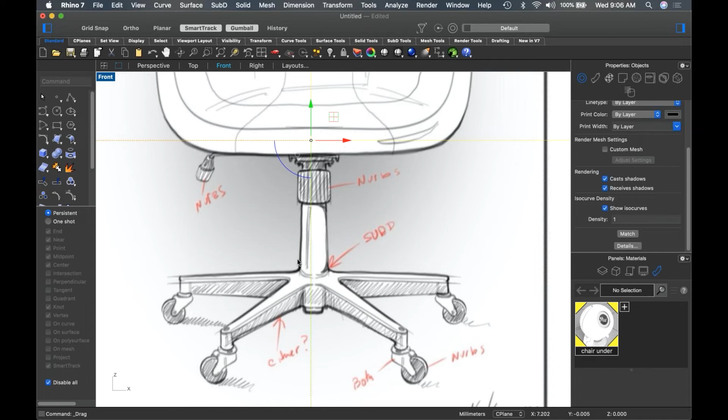We could build this out of Nurbs, but it would take a long time and we'd have to do lots of filleting and blending and continuity checks and all that kind of stuff. So actually this thing is a very good candidate for SubD, and that's probably how we're gonna proceed today.

So the first thing I do, and let me back up just from the very beginning, the way I start all of these videos - actually let me back up one step further and say, if you haven't seen one of these getting started videos before, they're intended to be interactive, right?

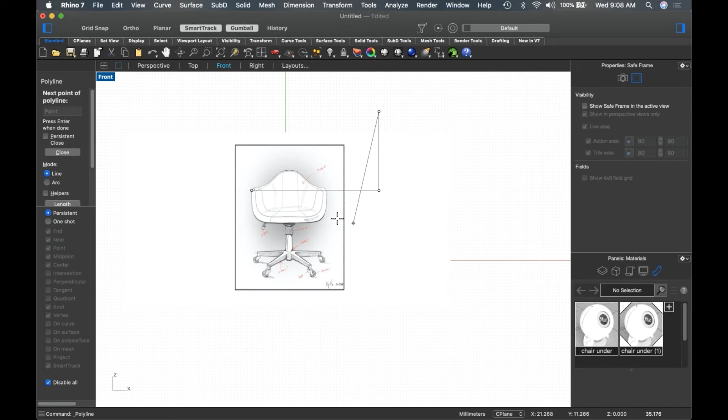So I just draw myself a little hockey stick out here in space, and then I grab this and scale it using my O snaps from one end to the other, and then I can say, okay, that's about 40 units.

Now, because this drawing is not in orthographic space, it's kind of got some perspective on it. You can see the bottom's tipped and the top has some perspective on it. So it provides some challenges when we're going to model it - we're going to actually have to do a little bit of interpolation along the way.

But as far as scaling things, if we know how wide this tube is, we can scale to the tube. If we know the diameter of the wheel, we can scale to the wheel, and that way we can get our sketch in about the right neighborhood of size.

So let's go ahead and make this a little bit more modeling friendly. I'm going to come down here to the materials panel, and scroll down to where it says object transparency, and drop - actually raise - the transparency on this a little bit to fade the image out.

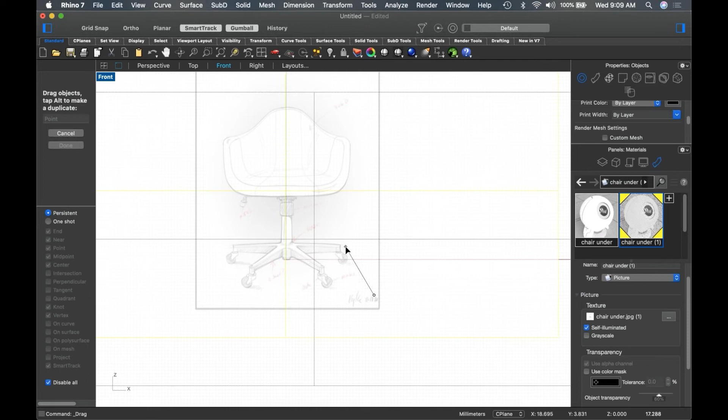Then I'm going to just nail this down kind of somewhere over the origin, somewhere in there, right? I want to be just centrally located. Then I'm going to go to the perspective view, and I always slide these images out of the model space. Everybody asks me why I do that, and the reason is because I can't stand when something looks like this.

Especially in shaded mode, it's particularly annoying to try and model when your sketch is in the center of your model. So if I just take it and tuck it back here in space, I can see it and I can see my references, and if I go to the front view, it's still lined up the way I want it to be. So that's why I do that.

And then if I had extra views, I would take those and copy them, and move them around into the different locations of where I wanted them to be.

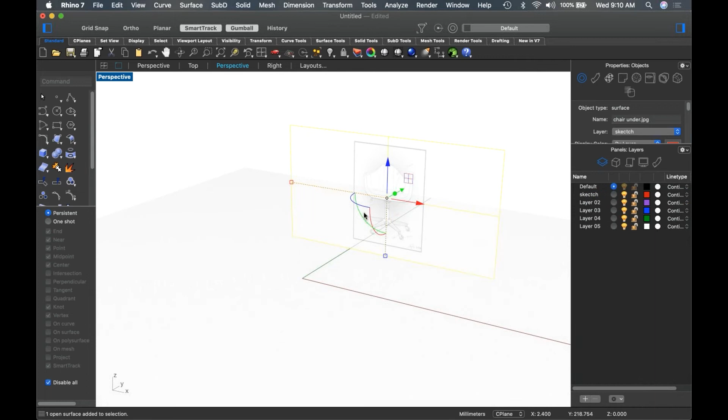And then I go back to my layer stack. Let's make this layer called sketch, and then right click and change object layer to move this image onto the sketch layer. The reason I like to do that is because I can lock these, and I can also hide them or unhide them as necessary. If I had more than one view, front, top, right, bottom, side, whatever, I would put each one on a different layer.

Spell it right. Yeah, I went to art school, but not that much art school. I can actually spell a little bit.

So we've got this set up. We've got this so we can turn it on and off. We've got it faded so that we can see. So let's start talking about what we want to do here.

We've kind of identified that we're going to do the chair out of SubD, and the base out of SubD. This little adjuster bit here, we may do a little of both. The wheels, we may do a little of both, and go from there. So let's go for the biggest bang for the buck here, which is the seat itself.

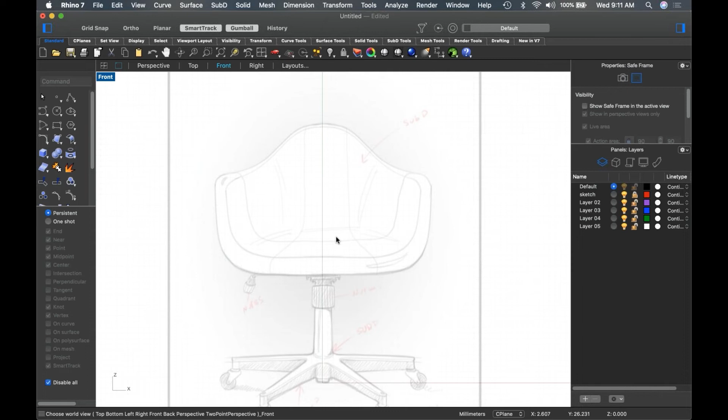And I'm going to go to the SubD tab over here. If you don't have tabs like this, by the way, go to the preferences and go to themes.

I'm running in the default - oh, they changed it. It used to be Mac and Windows, now it's minimal and default. So this is actually the default now. Never mind, you probably have this if you loaded it in V7. In V6, this used to have a Windows or Mac theme, and this was called the Windows theme that had the tab on it. But looks like they updated that correctly for V7 finally.

So everybody's working in the same model space.

All right, so we go to the SubD tab. I'm just going to grab a box here, and then in my XYZ count, I'm going to change this to 4, tab, then 4, and then 4. Come on now.

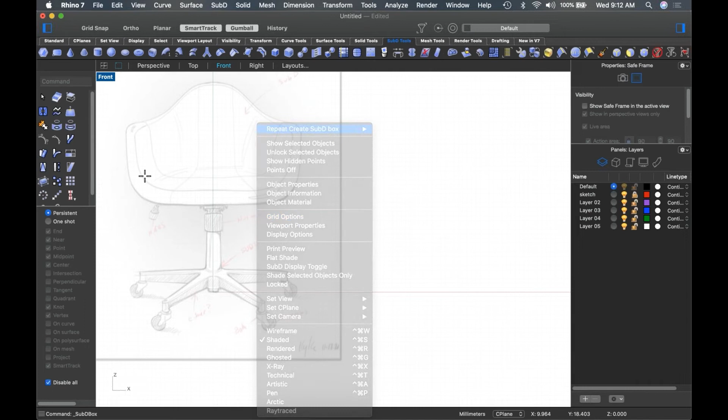Make that 4, 4, 4, and I'm going to do it from the center, and I'm just going to nail it down at the origin - I did not do that, so let's do this. 4, 4, 4, and then I'm going to do it center, nailing it down at the origin. I'm going to shift drag to bring it out as a cube.

I'm either going to pick the outside of this to aim for or the inside of this. I either have to make the seat bottom and then flare the arms out, or make the arms and then taper the seat bottom out. So I'm probably going to just aim for the seat bottom. I'm going to do something like that, and then just use enter for the same height. I'm going to use gumball to move it up.

Place it there, and then I'm going to go to wireframe so I can see what I'm doing. All right, so I've got my SubD placed, and I can see right off the bat that this thing is a cube, right? And my chair is not a cube. So let's fix that, and the way we're going to do that is I'm going to hold down Shift Command and click some faces, double clicking in between.

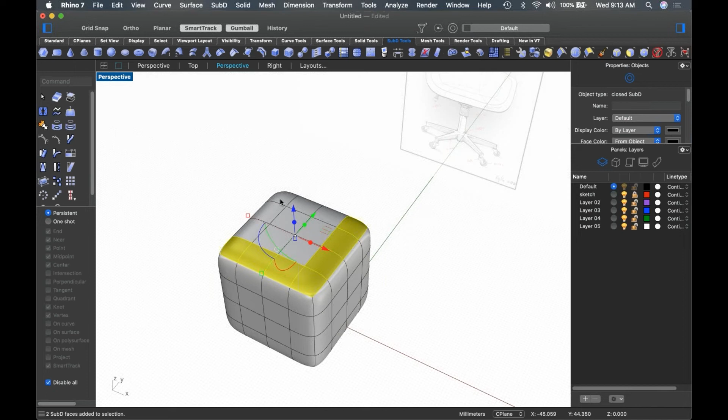And then I'm going to just delete. That's going to open the top. I'm going to Shift Command click a couple of faces, double click in between. See how it fills those in? Delete that. So now I've just got the basic form of my chair, right?

Go to the front view. I'm going to go back to wireframe. And I can see that I probably have one too many rows here. So I'm just going to Shift Command drag and delete it. Oops, got one too many. There we go. I'm going to delete that edge. And that gives me the basic layout of what I'm trying to do here, right?

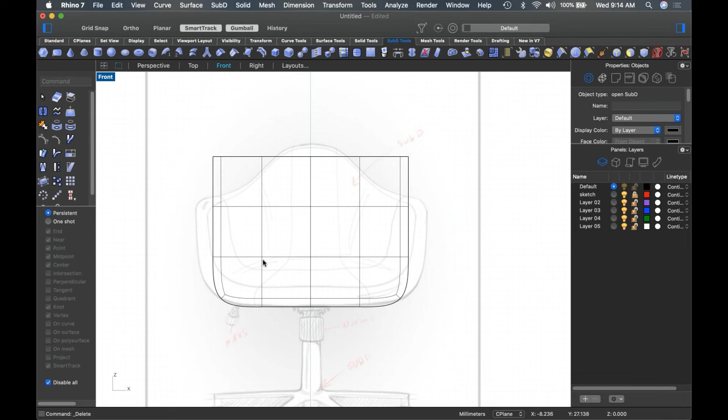So I'm going to focus on just modeling on one side of this. And to do this, I'm going to switch to box mode by hitting the tab key. And you can see that the SubD switches to a polygonal or control cage view. That's one of the cool things about SubDs, is they exist in kind of two spaces, right? This is the control cage or the polygon model, and this is the interpolated SubD, or the smooth model. So we refer to this as box mode, and we refer to this as smooth mode.

Now, how many of you have experience with SubDs? Has anybody seen SubDs, modeled in SubDs, know what a SubD is, or is this all new for everybody? Because if it's all new, I'm going to segue out for a second and just do a little demo on how we control the shape of a SubD. All new, all new, all new. Okay, I would expect it would be new for most people.

So let's talk about this a little bit. I'm going to scoot this off to the side for now, and I'm just going to make a new one so that we can play with it without screwing up the old one. And if I turn this on, right, if I go over here and I turn my points on, go to my standard and turn my points on, you can see that when I switch from smooth to box, notice what happens. The points don't move, right?

So there's a couple of pieces of a SubD. There is a control vertice, which is here, right? And the control vertice does not move. It stays in the same place no matter whether you're in box mode or smooth mode, okay? There are faces. If I shift command click, this is a face, right? And we can pull that and move it, and you notice everything attached to it kind of moves with it. There is an edge, and I can pick these edges, and I can move these around like this, right?

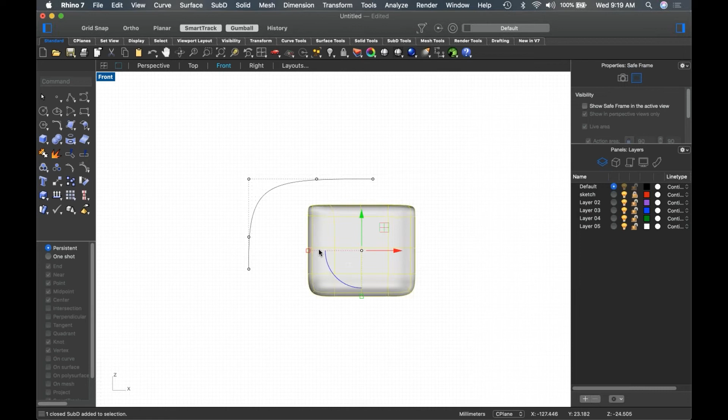That's the exact same thing that would happen here if I took this point and did it right and moved it up there. So you already know a lot about SubDs because you already know a lot about curves. Now, the one thing that I want to reemphasize about SubDs is that lightness is key.

So the lighter you can keep these things, the smoother and nicer and more controllable they're going to be. The same rule applies if you're doing a Nurbs corner. We don't ever do a Nurbs corner like this, right? That would be a terrible curve. We can all agree on that. Now, I get a really nice sharp corner here, but this is a mess. I would never do it that way.

If I needed a sharp corner, I would simply just do it with 3 points, but very close together. I can get a very sharp corner out of that. In fact, I can get them even closer as long as they don't cross, and get a very tight detail out of that depending on what I want to do.

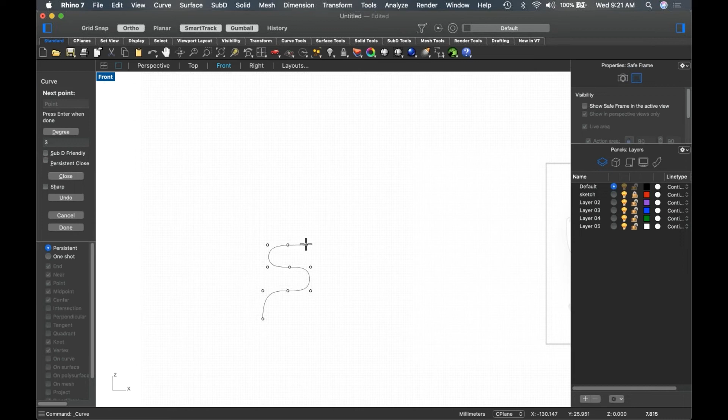Now let's extrapolate the rule of 3 one more time and think about this in a little bit more esoteric terms. So if I had a shape that goes like this, right, I'm still doing rule of 3, I'm just stealing a point from one part to the other. So let's do some counting. I've got 1, 2, 3, which makes up this corner. I've got 1, 2, 3, which makes up this corner. I've got 1, 2, 3 that makes up that corner, and so on and so forth.

If we looked at that on a SubD, each one of those points would be an edge. So if we wanted to make a SubD that had this structure, you would put an edge everywhere there's a point in order to make this happen. That's the basic structure of how a SubD is put together. Think about it in the same terms that you would as far as manipulating a curve.

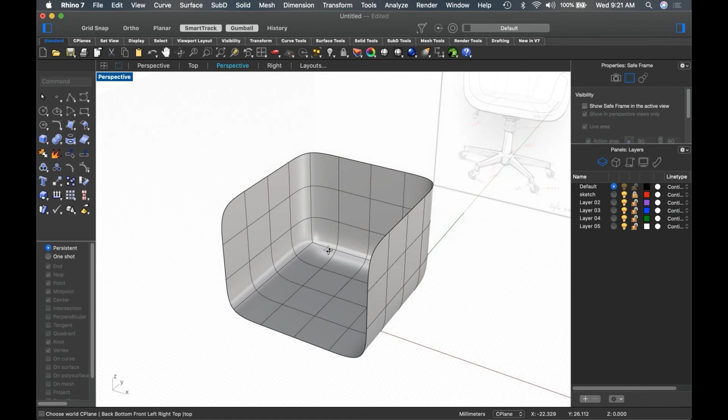So let's go to our chair and look at this and say what we want to do. Now, because this is a symmetrical object, I'm going to maintain my center line. I'm not going to worry about this stuff over here. I'm just going to model on one side and then we'll reflect it over at a later point.

So let's grab this edge right here. Let's relocate the gumball to here, using my O snaps to put it there. And then we're just going to take this and bend it out like that. Then I'm going to shift command drag these edges and pull these over. And then shift command drag these edges and pull these over. You can see how we can very quickly lay our SubD right on our art.

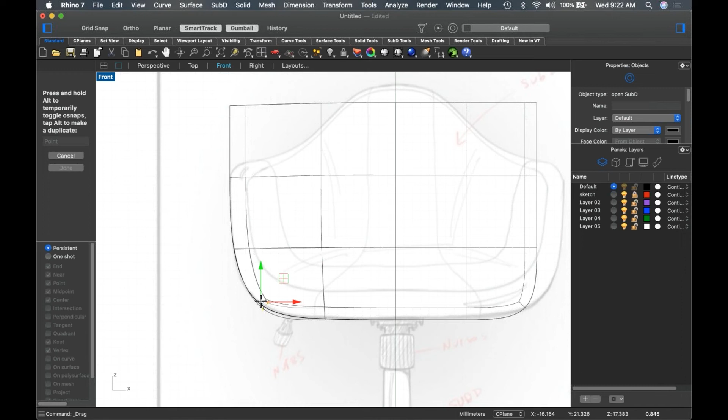We can shift command drag and just get it right on there. It's just like dragging taffy, right? And I may even have one edge more than I need, because this edge pretty evenly defines kind of where the back of this would be.

So let's shift command drag and just get rid of this top row. Then I'm going to grab these two edges and pull those up, and that's going to make my back. Then I have to look at this and say, okay, that's kind of my back, and that does what I need it to do, but it's not quite the right shape. So I have to say, well, do I pull this down? But I'm not really getting the shape that I want, right?

So let's add an edge. Let's just take this and double click, come over here to SubD, and we're just going to add an edge into the model. I'm just going to stick it kind of right there. Now this gives me some extra detail, which I can simply come down here, and actually I'm going to do this in box mode.

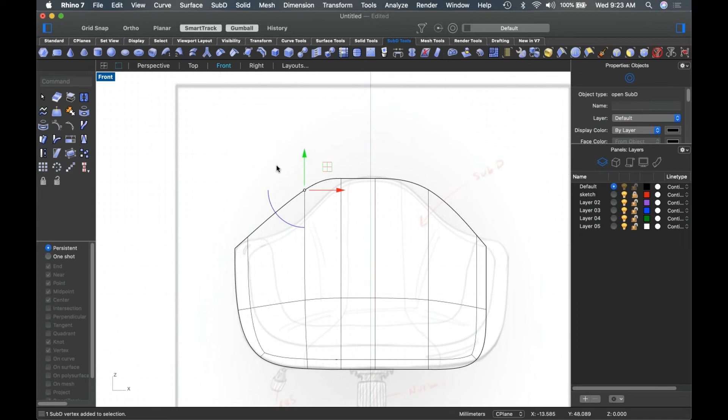I'm going to switch to box mode because it's easier to place this stuff, and we're going to think about our corners. What do we have here? We've got a corner here, right? So we need 1, 2, 3 points. That's our corner. We don't need 8, we don't need 16, we don't need 74. So if you've got 74 edges between here and there and you only need 3, get rid of the other 71 edges. Just double click them and delete them.

So I've got my corner here, and then I've also got a corner here, right? 1, 2, 3. So I'm going to steal this one, I'm going to use this one, and I'm going to come out here. So I've got all the detail I need in order to make my shape.

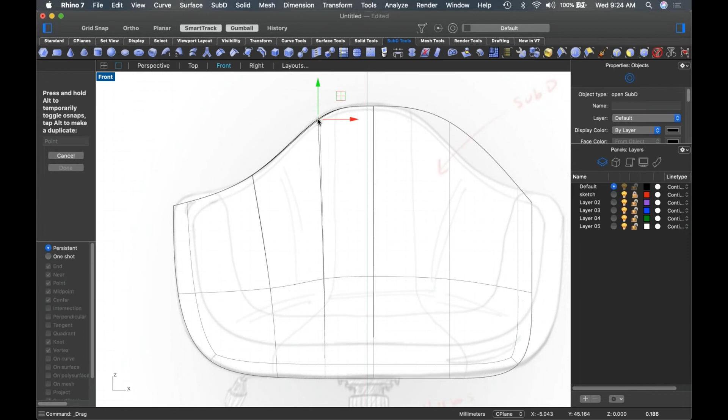And if I go to smooth mode again, then I can use a little bit of refining and just come in here and adjust my final shape. So what I want you to think about is box mode is where you do the bulk of your heavy lifting, right? And then smooth mode is where you kind of come in and just do a little bit of refinement here and there. And the reason I want you to do it that way is because it's very, very easy to torture your mesh in smooth mode.

And I'll show you what I mean by that. So if I come in here and I say, okay, I want a detail here, right? So I'm going to pull this point, and I want this to be a really sharp little detail like that. And that's cool, right? I like that a lot. And then I want to take this and I want to move it. I want to get this like really laser beam sharp like that.

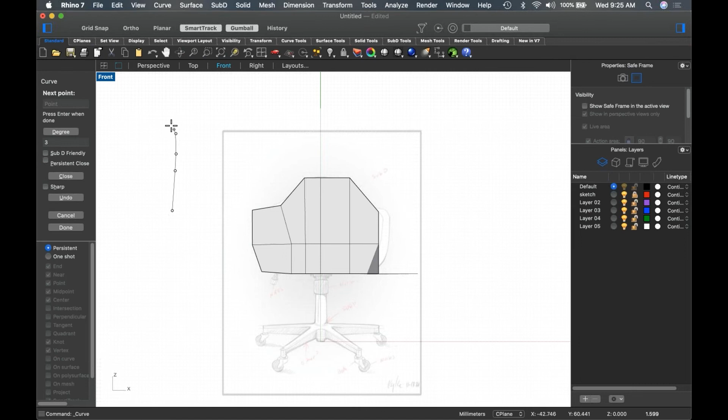And that's cool until I go to my mesh and I see that I've done this. Okay, this in a box mode mesh is the equivalent of making a Nurbs curve that looks like this. Okay, we don't want that.

So in order to get this detail, and to be fair, in quick and dirty terms, you could actually do this. This actually would convert to Nurbs and actually would be okay. It's just bad model practice, right? It's like single span surfacing in Nurbs is fantastic. You don't always get it. You know, we don't always practice that.

But so if you just have to bang something out, go for it. But what I want to do is encourage you to keep an eye on your box mode and try not to have this kind of stuff happen. If you need a detail like that, add some more edges in that area so that you can get that detail cleanly without really torturing your mesh.

Okay, so I'm not going to worry too much about fixing this over here right now, because we're just going to flip this over with the reflect command so we can do a little bit more sculpting to this thing. Let's raise this up a little bit just to add a little bit of under thigh support. And then I don't necessarily know if I even need this edge. I don't think I need it, so I'm going to pull it out.

And then I can use this edge to determine how soft this transition is in the back. If I pull it forward, it gets softer. If I bring it back, it gets sharper, right? So I'm going to pull it forward because I want that to really be soft back there.

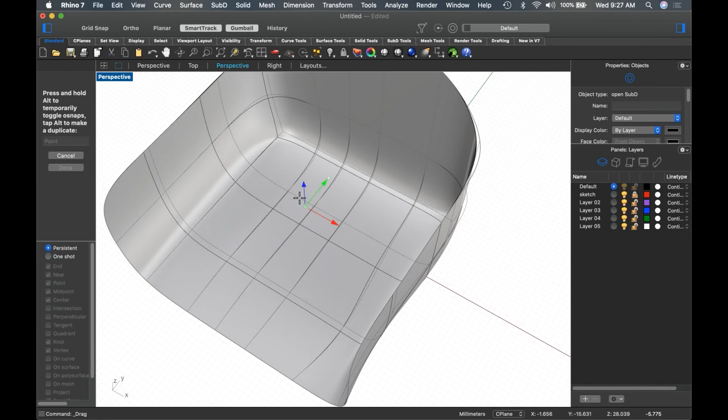And then I'm going to use this edge actually to push it out because I want just a little bit of curvature on the sides. I'm going to move this one a little bit. So I'm doing small moves in smooth mode, and then I'm switching to box mode and just double checking that I haven't done anything crazy.

Now you'll see that this edge right here, see how it jogs over and comes down? That will actually have an effect on how the light falls on the surface. And so the reason I keep harping on using box mode is we may want to come in here and just move this stuff around a little bit, just to increase the flow, to make it a little bit more flowy and a little less jaggedy.

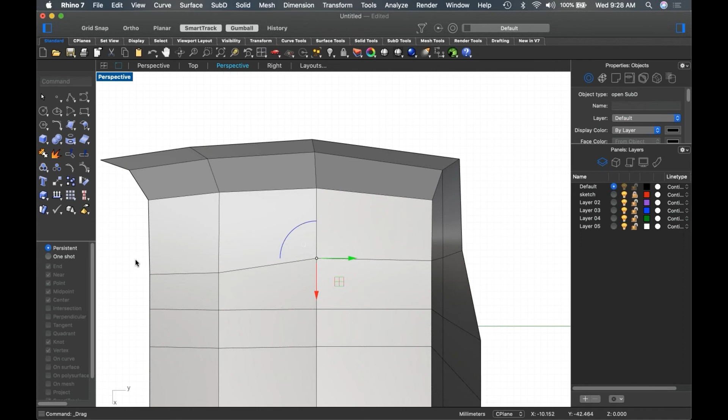The longer you do this as a SubD modeler, the more you'll get in the groove of looking at your box mode and being able to read it. See how this edge line flows in a shape like that, but this one's dead straight—we may not want that. I may want to visually interpolate between that one and the straight line, which allows the surface to fall off nicely and the highlights to track correctly. So as you're reading your box mode, keep an eye on anything that looks like this, unless that's the shape you're going for.

Let's go back to perspective mode and flip over to take a look. See how our highlights are tracking really nicely through there now? Let's say we're happy with that.

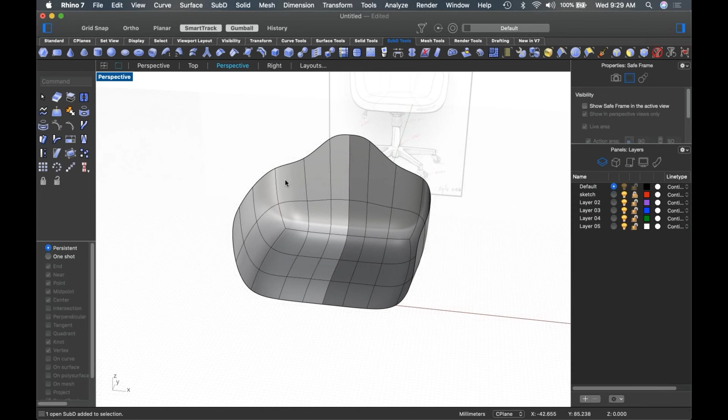Let's go back to box mode, go to the front view, and reflect this, using the center line. I'll do a vertex snap and drag, then pick the side I want to keep, and it flips over. Reflect has a light side and a dark side—this is the touch side, this is the no-touch side. If I try to do something over here, it won't let me because that's the reflected side.

If I move something over here though—say I grab this edge and move it—it lets me iterate and see what I want to do, so I can visually compare what's going on the left and right. When I let go, it updates, which lets you visually iterate and get the thing the way you want it.

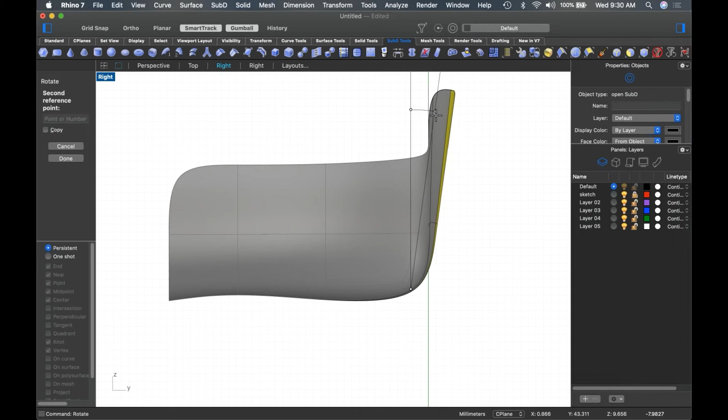Let's make one more modification. I'll grab this, go to the front view, right view, and rotate this stuff from here, and add a little angle to the back. Looks like I might have missed an edge there—no, it did it. So we've added a little angle to the back, and we'll take a look and decide how this looks in comparison to our art.

I might make a few more adjustments here—Shift Command click that edge and pull it up just a little bit. You can see how the reflect pauses for a second and then updates, so I can compare it from one side to the other. Let's make a few more little adjustments in here.

Let's go to wireframe and see where we're at. Because this sketch was done in perspective, we have a judgment call to make: do we say this arm is okay, are we trying to match this inside line down here, or are we trying to match the outside line? I think we probably need to split the difference.

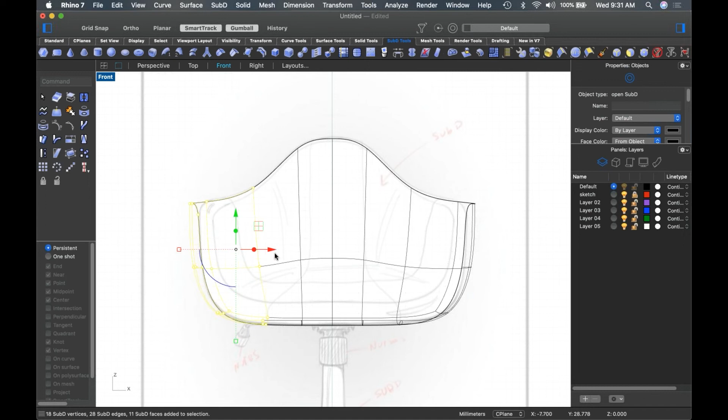I'm going to grab all of this and pull it over, sticking it somewhere in the middle. I think that'll get me where I need to be, and then I just have to readjust this. SubD modeling is a little fiddly. As you get better at it and we get more advanced, I'll show you more tricks along the way, but I don't want to feed you with a fire hose right this second—so we're just talking about basic pick and move for now, we're typing with two fingers, and we'll do touch typing later as we get going forward.

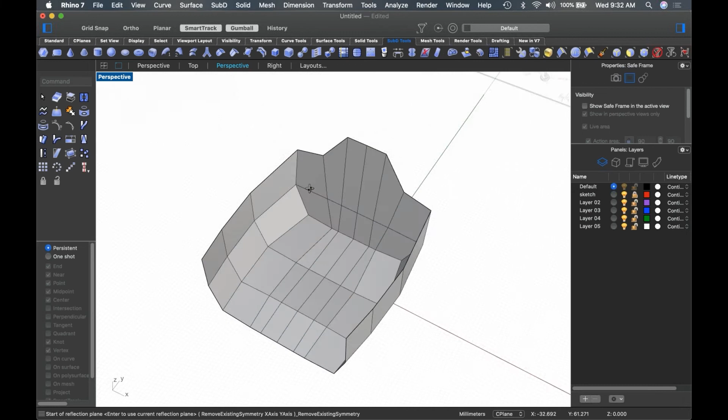Let's go to shaded mode again—we're pretty much done with the chair. We just need to add the thickness and stuff like that. I'm going to kill the reflection since I think we're in pretty good shape right now; I can always add it later. I'll right click here and get rid of the reflection, then Shift Command double click an edge, and this is fun.

I'm going to start dragging on a scale handle, hold down Shift, and then hold down Command. What that's going to do is extrude an edge all the way around here as it scales, and that's going to give us our flange around this thing.

If I hit smooth mode, you can see we've got most of what we need for our chair right now. Now we need to add a little bit of thickness to it, so let's go up here to SubD, offset SubD, and I'll just have to experiment with the units because I have no idea what size this thing is.

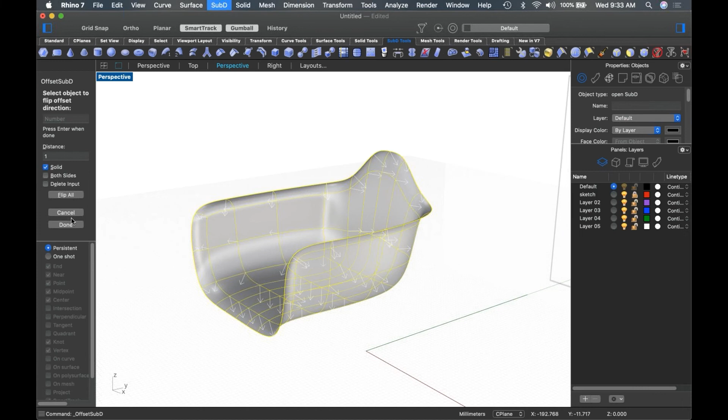Let's take a look at it. That's a little thick at 1 unit, so I'm going to undo it and redo it. Let's say we'll do a half unit. That gives us a nice thickness.

Now you can see, because this was an open SubD to start with, it creased these edges. See how they're very sharp like that? I don't necessarily want that, so I'm going to Shift Command double click.

Okay, so what happened here when I did the offset—let me back up. When I did the offset, I did not delete the input, so I had 2 SubDs stacked on top of each other. So let's do that again. Let's delete the input. Let's do it again.

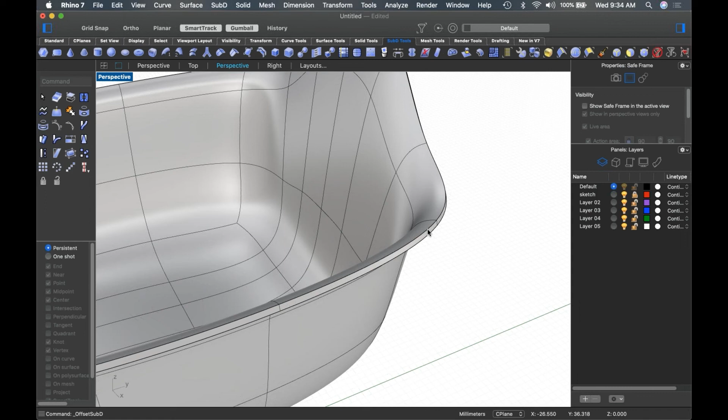There we go. Now if I Shift Command click, double click this, I get this entire edge. And then I'm going to go up here and remove the crease, and you can see that it just softens that right up.

See that? Now we still have a very sharp edge down here, and I don't want a sharp edge down here. So if I remove this crease, I want a little bit of an edge, but I don't want a super sharp edge. If I remove the crease, it goes too soft, right? I don't want that, that's too soft. So what I'm going to do is use this crease for right now.

Let's go to box mode, double click, and I'm going to apply a bevel onto this. The bevel lives right here. I'm just going to drag a couple more edges in there, and I only want... actually, I want 2 segments.

There we go, and this gives me my 3, right? Look at that, I've got 1, 2, 3 edges. So this is going to be either a sharp or a tight corner, depending on how far or how close those 3 edges are. So I'm going to drop it somewhere in there.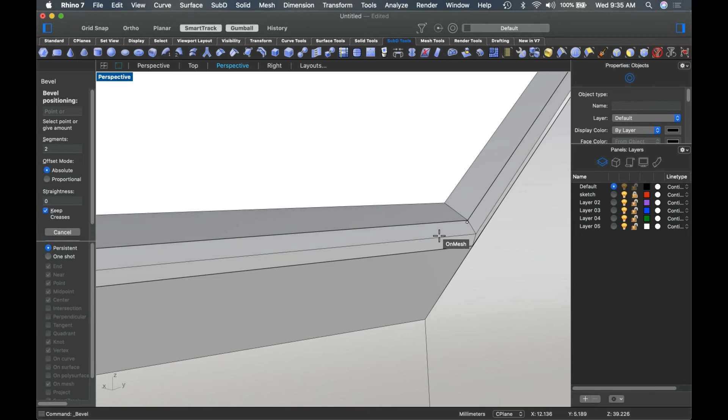And then I'm going to Shift Command double click, and remove the crease because I don't need it anymore on both those edges. When I go back to smooth mode, see what I get? I get a sharper edge, but not super, super sharp. And that's kind of what I wanted.

So that's how you can control this so that you don't get that 1992-era fuzzy Photoshop sketch look, right? This is how we add a little bit of sharpness to things.

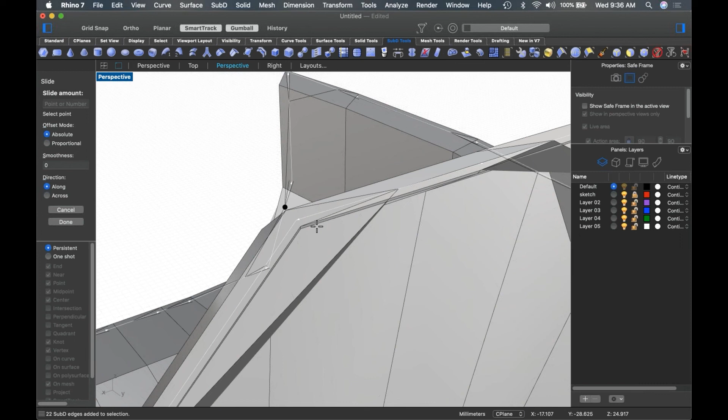I can also Shift Command double click this edge and slide it. This works better in box mode, by the way, so let's do it in box mode. And I can slide it. There we go. Oops, going the wrong direction.

Looks like it's looking for its input down here, so let's go where it wants us to input it. And I can slide this edge closer or farther away. So if I bring it in tighter like that, and then I do the same thing here, I can bring these very close together without crossing—I don't want to cross them. And then I can see that edge tightens up.

So the cool thing about this is you end up getting stuff that looks kind of production ready, super, super easy. Now, if you've ever tried to model a form like this, you know how difficult it is to get something that's super smooth. So let's just see how we did by going to Emap.

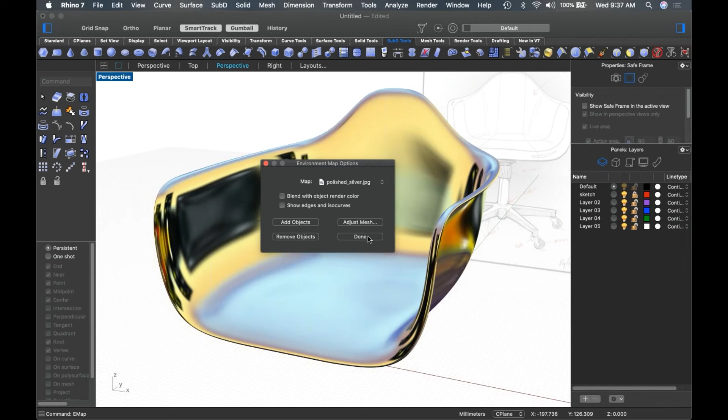And you can see that we have some really nice continuity here. In fact, let's do Space Needle, that's always a good one. You can see that we end up with really high quality surfaces.

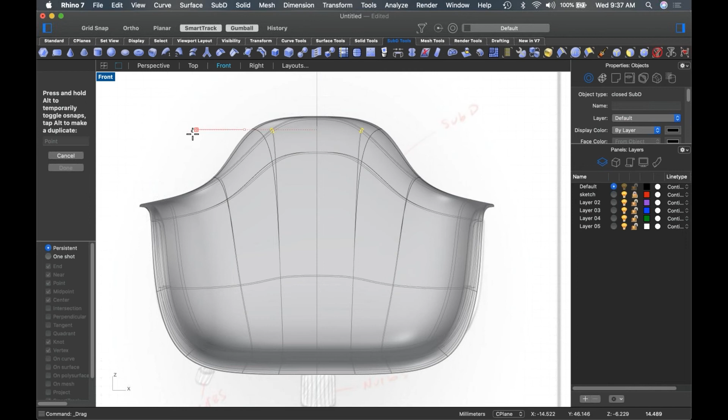If you've ever tried to do something like continuous curvature in NURBS, you'll know how difficult that is. So we've got our chair pretty much done. We can do any adjustments we need simply by drag selecting these edges, and we can add some more curvature here. We can now start iterating with this, say is this back wider or thinner, maybe we'll make it just a little wider like that.

I'm using scale because it operates on both sides of the center line. So let's throw this on a layer. How are we doing for time? 9:38, doing all right. Okay, so let's call this the chair seat. Let's take this and throw it here. And I'm just going to hide it for now.

So let's talk about the base. Now, we don't know how big this base is, so I'm going to start by giving myself a reference curve, and draw this a circle and say it needs to be this far. Then I'm going to go to perspective, grab this, and rotate it 90. This will give me a reference, a visual reference from the top view to know exactly how big we're looking.

What Mac am I running? I'm running a Mac that's probably older than the Mac that you're running, Damien.

I'm running a 2014 MacBook Pro, but it does have the old Nvidia graphics, which is the reason I hold on to it, because I don't really like the AMD graphics, and the M1 stuff, we don't even know whether Rhino's going to run on it yet because we can't get hardware to test. So if you're looking for new Mac hardware, please, please, please hold off. Don't buy one with Intel Iris graphics. Don't buy the 13-inch MacBook Pro because it does not have standalone AMD graphics, and don't buy any of the Silicon M1 stuff because we don't even have hardware to test to see whether Rhino will run on it.

It's been a huge architecture change. Our entire Mac dev team is scrambling right now trying to figure out whether or not Rhino's even going to run on the M1 stuff. So if you're going to buy new Mac hardware, anything, make sure that you get one that has the secondary AMD card in it. If you get the Intel Iris or the Intel UHD graphics 13-inch MacBook Pro, Rhino's going to run terrible. We do not run well on the Intel stuff.

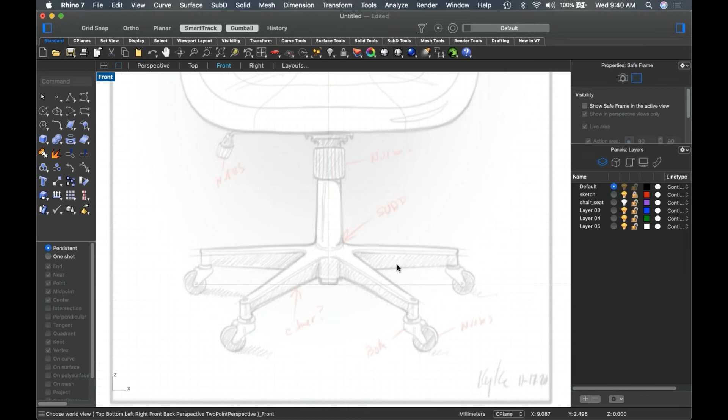All right, so let's talk about the base here. The first thing I'm going to do is go back to the SubD menu, grab a primitive, and draw my cylinder starting at 0. I'm going to figure out kind of where I'm at, then change my direction constraint to none. I'm going to pull it right up. Okay, and we end up with a SubD piece here.

You'll see that it kind of has this Tylenol shape to it. I'm just going to shift, drag, select, grab all that and delete it. Get rid of the ends and open it up, which also gives me square tubing. The other thing you'll notice is it's got 3 intermediate sections in here, so I'm going to pull these out because I don't need them. What this does is changes it, so now I've only got 2 points, right? This is just like a curve that's got 2 points.

And if I shift, drag, scale this, I can taper this thing nice and cleanly, which is kind of what I want to do. I want to add just a little bit of taper to it. And actually, I need to double check this, I don't think I paid attention to this when I did it. Because this has got 5 arms, I want 10 faces around this, so let's go back and do that correctly. I think this was only set to 8. Yep, it was. So let's do 10, and I'm going to just do 1 vertical face.

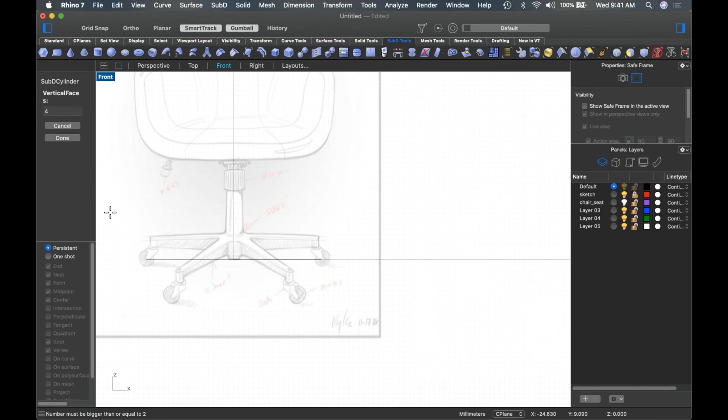And I'm going to put this at 0, and then let's pull that up. All right, so let's go back and do this again. Just delete that, which opens the end.

Let's see, did it give me the right faces or did I screw something up? No, that's right, it gave me the right faces around, but I screwed up the verticals. It didn't take my input.

Shift drag to add a little bit of taper. And then I'm going to shift command drag that, pull it up, and place it right about there. So that is the center of my array, right? And this is the distance of how far it's got to go.

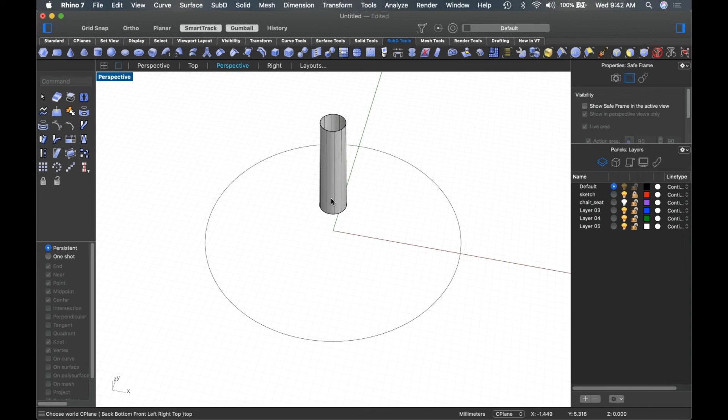Now, the reason I did 10 faces is because I've got 5 arms, right? So I'm going to get rid of these intermediate faces. What I can do is grab one edge, and use the extrude icon. Let's do this in box mode. And I'm going to just pull this all the way out till it snaps near there, so I know I've pulled that out as far as it needs to go.

And because this is a radial object and we don't have radial arrays or radial symmetry yet, I'm going to do something a little counterintuitive. I'm going to extract these 2 surfaces, delete the rest of this, and then model my one part and use a polar array, which does have history, to do my adjustments.

So I know my arm needs to be about that long. I might need a few extra edges in here to do some detailing on the end, so let's do that. Let's add some edges, I'm just going to put one there, put another one there, because I've got 3, so that gives me the ability to do that, right? So now I've got that shape.

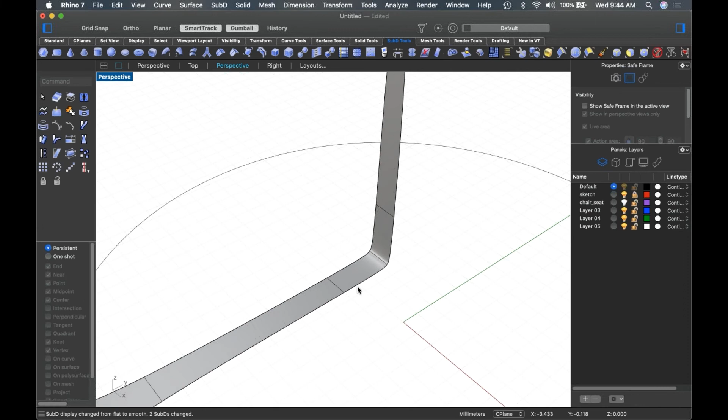Now this transition is too small, is too fat, because 1, 2, 3, that's making up my curvature. So if I want to tighten this, I'm going to come up here and bevel it, and add a couple more edges in that area, and then it tightens up. Starting to see how that works?

All right, so let's take this and do a polar array. I'm going to do this at 0. I want 5 arms, and that gives me my 5 arms. Now this is my parent object, so if I grab these faces and move them down, all the other ones are going to adjust.

Ooh, it didn't. Oh, because I didn't do it with history. Never mind, let's do it right. I look dumb, so you don't have to. Let's turn history on and do it again.

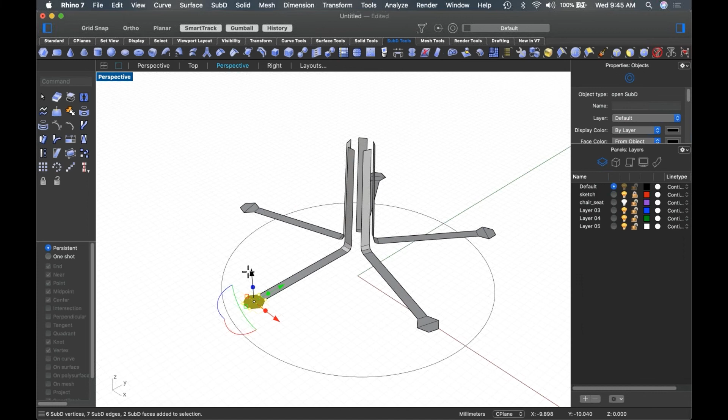There we go. Now let's not look dumb. There we go, so now it adjusts.

So now this gives me the opportunity to come in here and say, okay, well, how does my array look? Do these pieces need to be fatter or skinnier? Does this need to be fatter out here? Does this need to be way fatter? Does that need to be like that? And then we can switch back and forth and kind of see what it looks like.

So let's connect this stuff. To do that, I'm going to Shift Command click these three edges on both objects, and bridge it with one segment, but I'm not going to join it. And that seems counterintuitive, but I'll show you why.

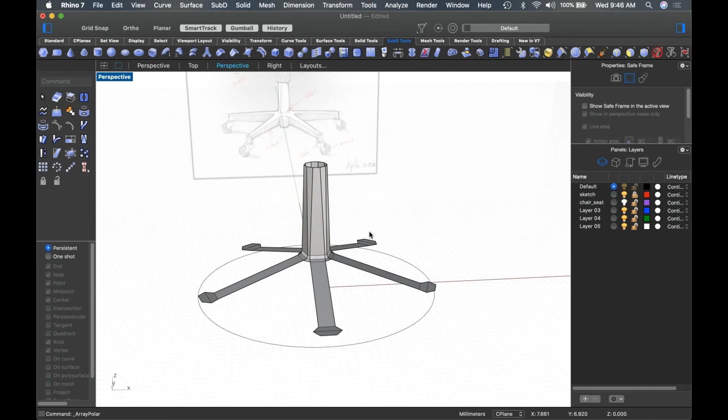Because I'm going to take this and then do another polar array using the same settings. And that gets me the rest of my part, which I can then drag select and join.

Want them to be smooth. And it broke the history, which is fine. And then if I switch to smooth mode, you can see I immediately get kind of what I was looking for.

So I can look at this and say, well, I don't really like how this corner is happening. So that means I probably need to go back and make these edges smaller. So I'm actually going to undo this, and make this guy smaller, and make this guy smaller, and make this guy smaller.

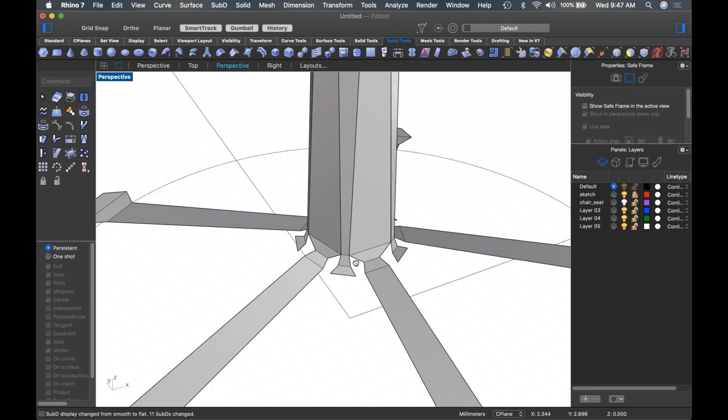See how history is helping me out here? So I'm going to make this the same width. And then I'm going to go back and do my bridge over, and see if I can get a little better result. And I may even need to bridge with two segments, so we'll take a peek at that and see.

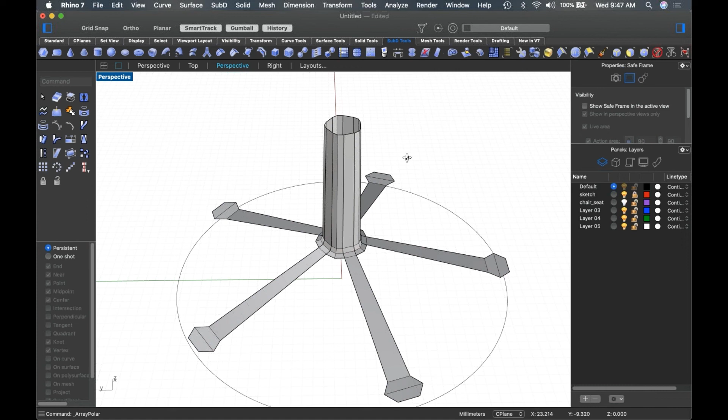So it's only one segment. If I change this to two, and then I can mess with my straightness, that's going to help out a lot. So I'm going to add a little less straightness on there. I'm not going to join it. And then I'm going to do another polar array. Still have a little bit of a star shape.

But we're better than they were. So if you wanted to mitigate that, we simply would just move these points closer together, or we could add an edge right down the center of this, and that would allow us to be able to adjust that as well.

So let's add a little bit of thickness to this. I'm going to double click and select this entire edge, and then check this out. I'm just going to grab the extrude dot, pull it over, pull it one more time, and that gets me a beautifully smooth base in here.

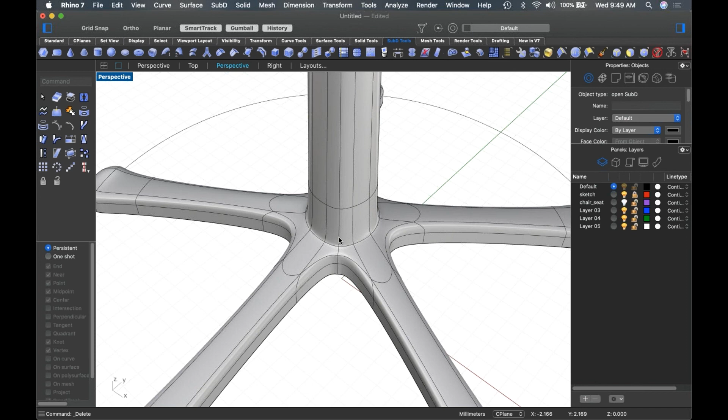Now let's see what happens if we remove this edge. That starts to smoothen that up a little bit, doesn't it? So let's do that. See how that's cleaning up? The wonderful thing about SubD is it's incredibly durable. You can add stuff, take stuff away, play with it, do whatever you want, and it's going to stay really nice and stable. See how that rounded up on us? That's kind of more of what we wanted.

In fact, we may even want to play with these edges. Do we want to get rid of these edges? I don't like that. See how it pulled the highlight out? I don't like that. So I'm going to leave those back in.

But this edge is a little bit sharp, so I'm going to grab this and slide it farther up. And then I'm going to do the same thing here. And then when I go back, see how nice and soft that is?

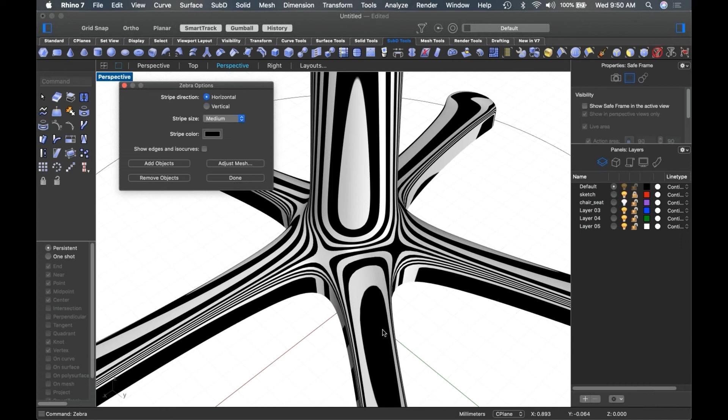Now check this out. Check out the surface quality on this stuff. Take that, NURBS. Pretty gorgeous, huh? How do I add that thickness?

I double-clicked an edge, this one, and I just used the extrude dot on the gumball, and we extruded another face out. That was a good question because I needed to do that again anyways. And then what I'm going to do is Shift Command click, double click, select all of those faces, and I'm going to extract those because I want to break those off of the model.

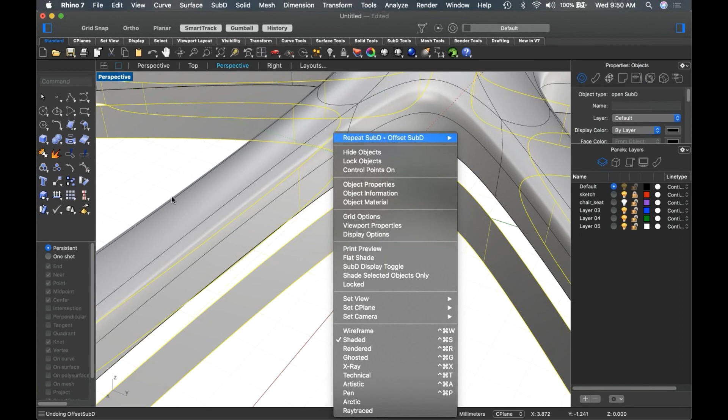And then I'm going to do a SubD offset to the inside. Let's do 0.5 units, let's try that. I don't want it to be solid, and I do want to delete the input. Oops, got to go the other direction. Let's flip it. There we go.

And that puts it in, right? So it offset everything. I'm going to take this and tuck it back up whence it came. And then check this out.

Shift Command, double click. Nope, not that one. This one. Nope, not that one. This one. There we go. And then I'm going to bridge these two together.

So think of bridge as like your blend tool, right? Remember blend surface in Nurbs? Bridge is like your blend surface. So if you've got two objects and you need to connect them, bridge is the thing you're going to use to do that. Now, if I roll my mouse, click and roll, see how I can add or remove edges here?

In this case, how many edges do we need to make a corner, folks? Three. I've already got two, so that means I only need one additional. It says two, but stick with me. So let's go ahead and throw that on there.

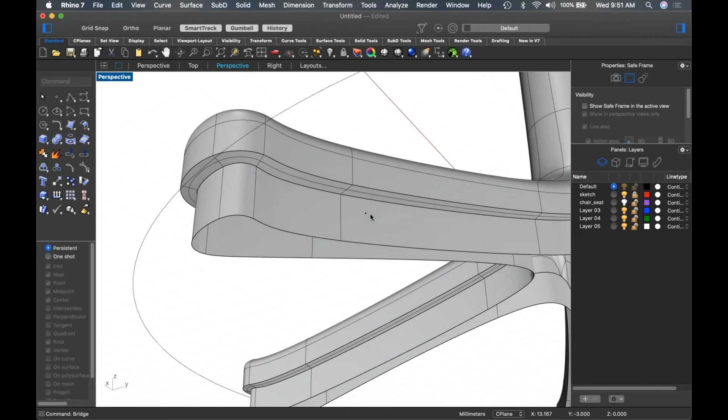So these are now, oh, I didn't use the join. So let's join them, and I want it to be smooth. And it joins up, and you can see that immediately we get 1, 2, 3. So we've got our S curve, right?

We've got 1, 2, 3 to make up the bottom of this, 1, 2, 3 to make the middle of it, and then 1, 2, 3 to make the top of it, just like we would if we did this in a Nurbs curve. If we want it tighter, what do we do? Move this down.

If we want it softer, we move it up. Let's tighten this one just a little bit. Again, one of the goals as you're SubD modeling is finding that nice balance between thick and thin, soft and sharp.

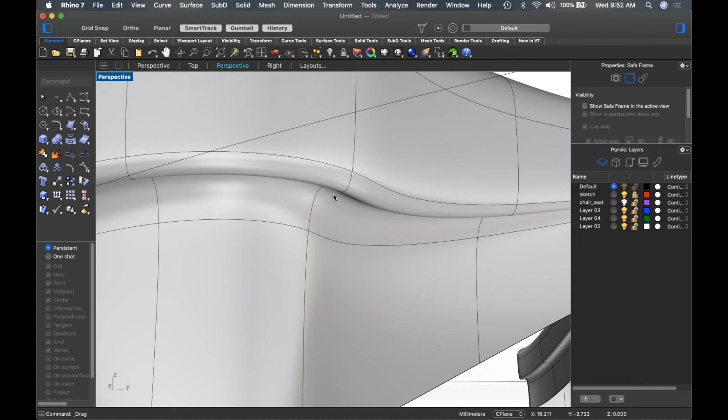If you can't get enough detail, see how this is starting to fold over on me? I don't want that. So maybe I need to grab this edge and bevel it, add more detail here. Let's bevel that. Look at that, see how that sharpens up nicely? Now we're starting to get a really cast-metal looking part, which is kind of what we wanted.

Cool, right? All right, let's see what it looks like with our chair... other than being horribly out of place. Let's put it like that. So let's talk about the casters.

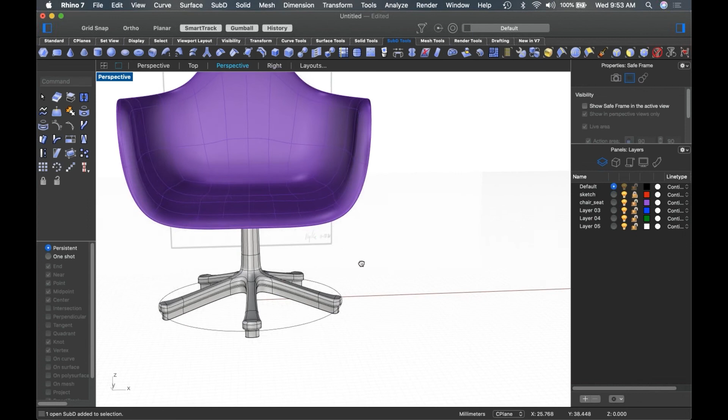So let's throw this on a layer. By the way, I mentioned durability - I wasn't kidding, let me show you something. Actually, we'll use the base because it's more suited.

All right, so I did this in a demo with a customer. We were talking about SubD and they just about lost their mind when I did this. Let's make something like this. What are we doing on time? Yeah, we're a little behind, but that's okay, I think it's worth it.

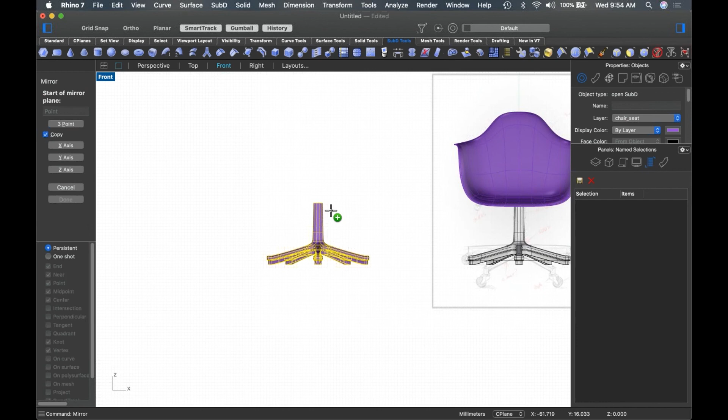So let's do something like this. I just mirrored it and joined it and want it to be smooth, so I made a new SubD thing here. This is all connected. Let's take this and apply a twist deformer to it. I'm going to start the twist deformer here, and then finish it up here, and then start twisting.

Now, if I did a SubD twist, this would be a reasonable amount, right? Well, the way I did the demo is I did the twist because I had so much faith in how durable these things are, that I went a little nutty.

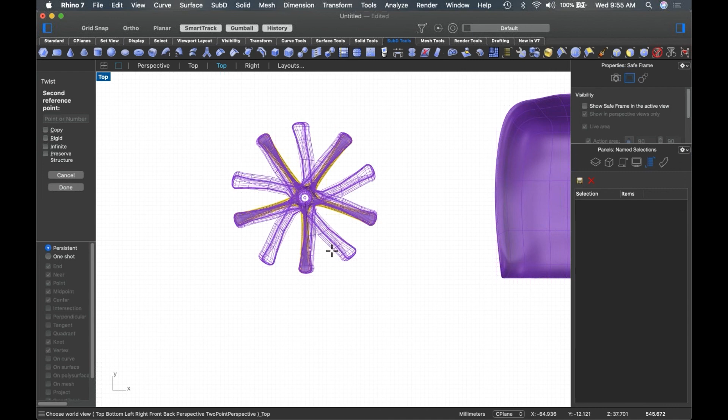And poor Scott Davidson almost had a stroke when I did this. I started twisting as I was talking, and said, well, you can just keep twisting and keep twisting. Twisting it once would make sense, twisting it twice is getting a little crazy, twisting it like 3 times is crazy. But as I was talking I just kept doing this and kept going. I felt the tension in the room start to increase a little bit, and I just kept going and going, torturing this poor thing. And then I let it go.

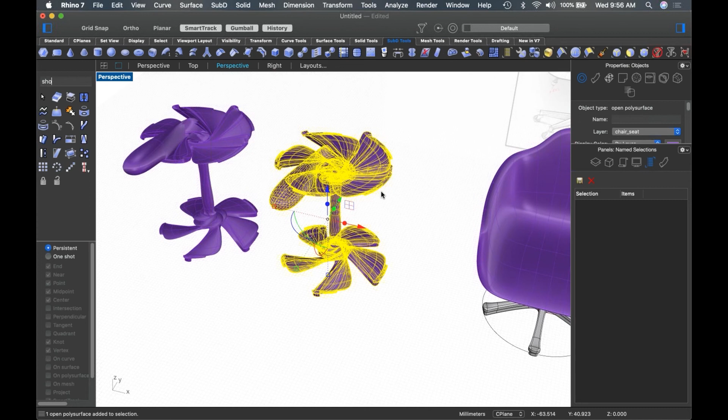And it just went blink and did it. Not only did it do that many twists, but check this out - it's still a valid SubD, I can still model on this thing. Not only that, but if I use the toNurbs command, it actually will create a Nurbs object out of this... it's got its validity. Ah, that's interesting.

This one actually has a naked edge where the other one didn't. Ah okay, let's see naked edges. What are the naked edges? It might have been because the thing was open to start with.

Anyway, the point here is that not only is this stuff incredibly durable, because you saw that it did it, but the quality of the surfaces is actually very good as well. I'll have to investigate where that edge came from - it might have been something open before I started the part, or it might be a bug I have to go find. Anyway, you get the point.

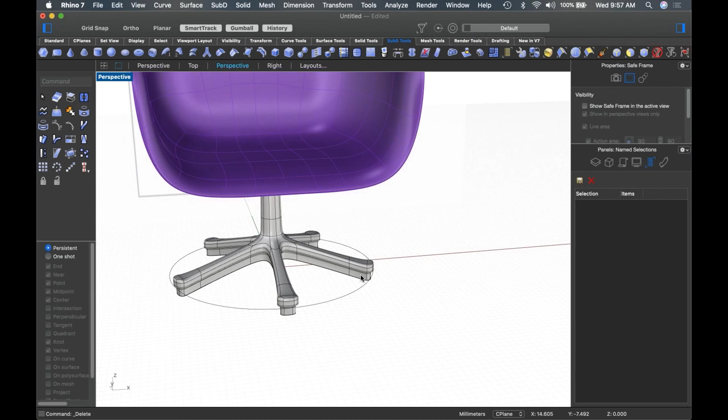So let's back up a little bit, let's just get rid of this stuff. That's the durability of this stuff, it's really, really kind of bulletproof. Now that I said that, I'm going to save because I haven't saved this model yet. They're like, oh yeah, you've got faith in this. No, I do, I just know how computers work - I'm worried about my Mac, not my Rhino.

All right, so let's build this caster. The caster is a Nurbs part. We want to just use a standard... actually, I'm not going to use a cylinder, I'm going to use a tube, so I get my axle hole for free. And I'm just going to follow my part - no, not a truncated pyramid, silly, I want a tube. There we go.

I'm just going to follow my drawing over here and say, I think those wheels are just a hair small, so I'm going to pump them up a little bit and get my axle in. Then go to top view and say, oh, it would be about that thick. So now I know this is a perfectly round part. One thing about SubDs is they're not perfectly round - even with 8 surfaces or sections around, they're not perfectly round. So if you need something like wheels, I would use Nurbs. Let's do a blend edge here and here just to soften these.

So we've got our wheel, right? I'm going to rotate this around so that it lines up with my front leg, like that. And then I'm going to straighten it out. There we go. And then I'm going to snap it to the center here, so I know I've got it placed correctly. It's actually kind of cool like that, but I'm going to drop it down under here.

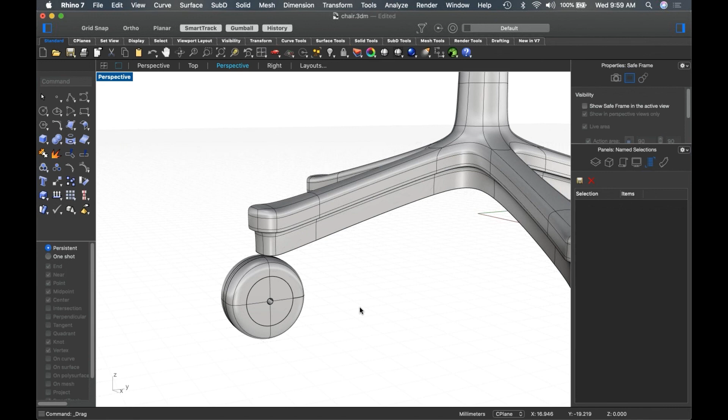And then we'll talk about how to do the caster. So if we go to the front view, right view, we can see that we've got our axle here, and we may even want that to be out a little farther, right? Because it's a caster, so this is going to be our axle, and then we want it here, so as you roll, the caster goes in the right direction. And we know that it has to kind of fit under here, and I may actually tuck this down just a little bit.

So I'm going to make the part from the top out of SubD. There's a couple of ways we can do it. We can use what's called a paper doll technique, which is to lay something out flat and then just add some thickness and some shape to it. Or we can start with a cylinder and take parts out of it. I think I want to show paper doll just because we haven't shown that yet.

So let's go to SubD, and I'm going to grab a single face, and I want this to have one subdivision in that direction and one subdivision in this direction. And then I'm just going to place it in the scene. And if I switch to box mode, you can see that that's just a very simple square, right? I can scale it, do whatever I want to it, so I know approximately what shape I want.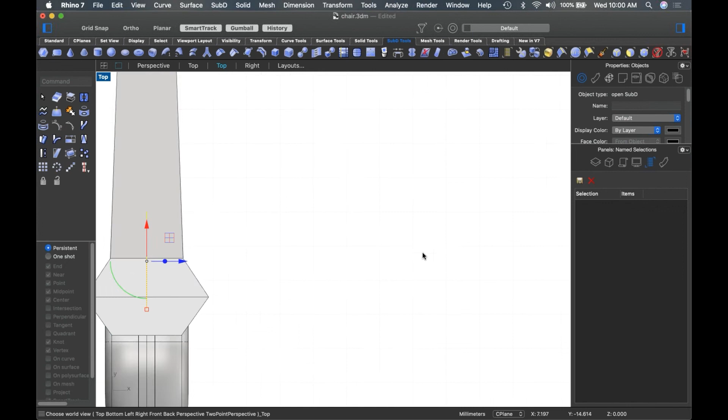So what I'm going to do is Shift Command click on an edge and just use the extrude dot to add a few more edges in here. And then I'm going to grab these edges and I'm going to pull them down. Let me put this in space, in the correct orientation, so I can see what's going on.

And then I want kind of this point to come forward like that, and maybe these two edges, both of these come forward like that. And then I'm going to pull these down a little bit, but I'm also going to move them forward. So I've got this kind of caster shape, right? And if I switch to smooth mode, you can see that I'm kind of getting the shape that I want.

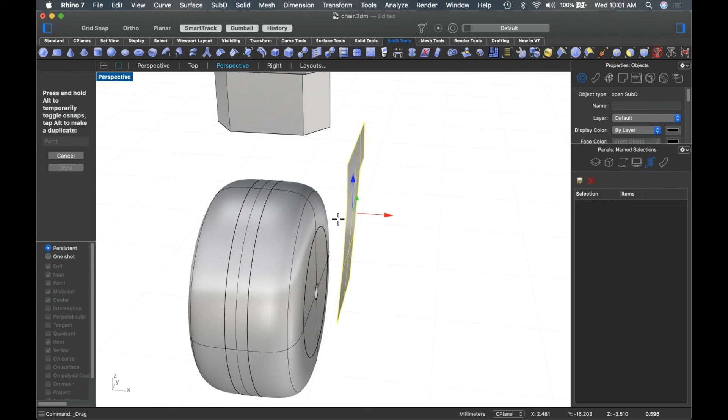Let's make this a little bigger. Let's make this a little bigger. Let's pull this forward just a little bit. So you can see how easy it is to lay this stuff out just like you would if you were sitting with a piece of paper and cutting out a shape. So I've got my basic shape for my caster, and let's place it kind of right up against there.

And then I'm going to mirror it around the center line. We're almost done, by the way, so if you're close on time, we're getting close to being done. I'm going to mirror that over.

And then I'm going to use bridge to put these edges together, double clicking the center ones. I'm going to put it together, but I'm going to use straight, and I'm going to use 2 segments in there, that's fine. It just gives me 1 segment down the center, which is nice because I can do that for symmetry. And if I toggle that—oops, didn't join them. Let's join them.

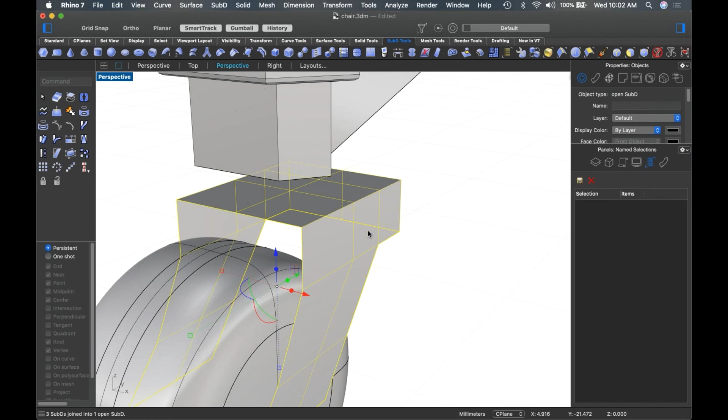And if I toggle that, you can see that I get kind of a nice, like stamped steel kind of caster shape. Cool. Let's add a little thickness to this with a SubD offset. In this direction, I am going to go out, and I think 0.5 is probably too much, so let's go 0.25.

Oops, I did want that one solid. See, it's so nice of me to make all the mistakes and look dumb so you don't have to.

There you go. And I want to get rid of this crease, so I'm just going to take the crease out, and then that makes it kind of a nice soft cast part with a sharp inside. And I'm actually kind of okay with that sharp edge. If I was going to do a really detailed rendering, I'd probably bevel this edge, but for this, we're probably okay.

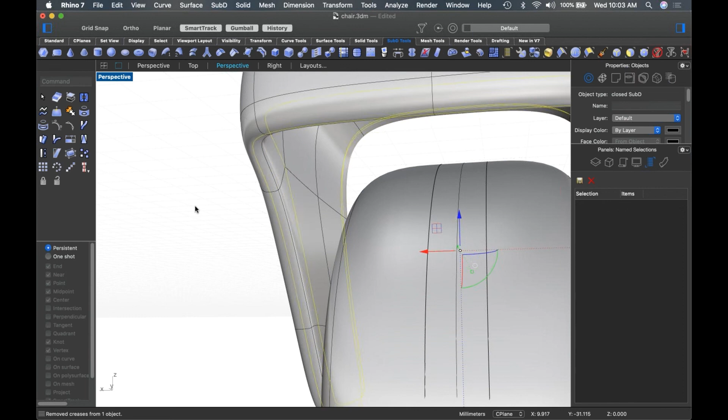He says as he bevels it anyways. So there's our nice caster part.

And then let's just add, because we want it to be perfectly round, a Nurbs cylinder. I'm going to just snap it to that vertex, pull it out about there, bring it up.

And then you'll see something interesting. Watch this. If I... that's not it. You're like, that just looks like you screwed up. Yeah, I did.

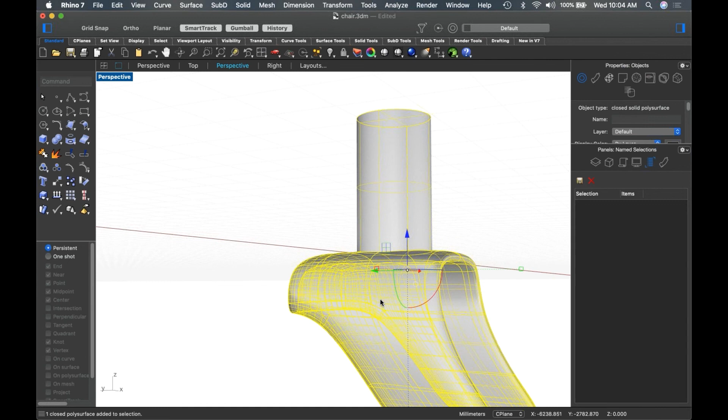Now, this is what's interesting. I've got a Nurbs object here and a SubD object here. Check this out. If I Boolean it, boom, they Boolean, but the thing that you have to understand is this is no longer SubD.

So if you're going to do this, make yourself a layer over here. I usually call it like SubD graveyard or SubD parts or something like that. Make a copy of this beforehand so that if you get down the road and you find that you need to make a modification to this lower part, then you can do it. It's easy to do.

Let's add a torus on this because we can. That'll be our little landing pad that thing sits on, like that. And let's Boolean the whole thing back together. Let's bring that down, and then we will adjust all of this like that.

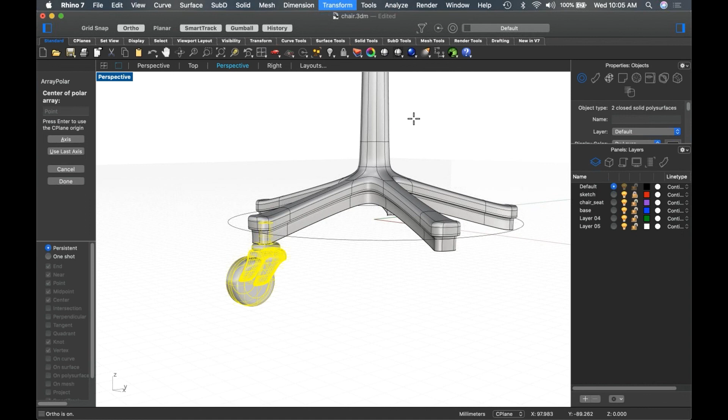Okay, so there's our caster. So let's just polar array this. There's our casters. And the last part we need to make is this little doodad up here.

So let's take a look at that. I'm not going to bother making a little handle out here. That's just a simple Nurbs part. You guys can do that.

So if I want to steal from a SubD, all I have to do is drag another set of edges out, and then I can grab this thing and explode it, and then I can steal a part off of it. It's kind of cool. It's almost like a plant, right? You can grow a little limb and then cut that off and then grow a new plant out of that limb. That gives me the ability to pull this down, stick it in space, and I don't have enough.

I can't change the shape of this because I only have 2 edges. So I'm going to add an edge.

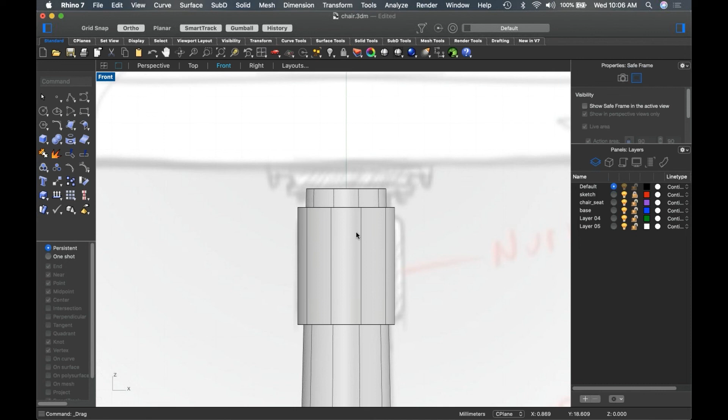Of course, the add edge tool is in a different position on this machine than it is on my other machine. So I can find that and blend surface. Anytime you see me do a Nurbs demo on the Mac, I'm always like, where is blend surface?

All right, so I'm going to place this kind of like that, and then I'm going to double click this. Check this out. Start dragging, hold down Shift, hold down Command, and it extrudes out an edge, just like we did before. I'm going to do that twice just to get the thickness on that. So that's how I rolled that edge. Start dragging, hold down Shift, hold down Command, and then it extrudes an edge.

And I'm breaking my rule here. I'm actually modeling in smooth mode, but it's a small enough adjustment that we can make it happen. So then what I can do later is once this gets converted to Nurbs, I can just Boolean these out, and I know these parts are going to fit perfectly.

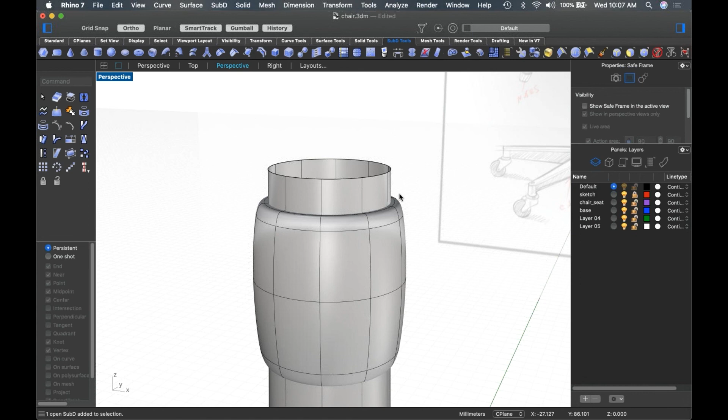There's some ish in SubD because it's more of a sculptural process than it is a mechanical process. So as far as you can put numbers on it, you can dimension all of this stuff, but because of the sculptural nature of it...

I tend to do any precision work in Nurbs versus trying to do the precision work in SubD. So I try to get my sculpt and my shape and my form in SubD, and then I add the precision later. If I Boolean this stuff, then I can put dimensions on it and know exactly what I'm dealing with.

Okay, so let's add one more bit here, and we are about out of here. So I'm just going to make a cylinder like that. I don't need that edge, don't need that edge, so I'm going to delete them.

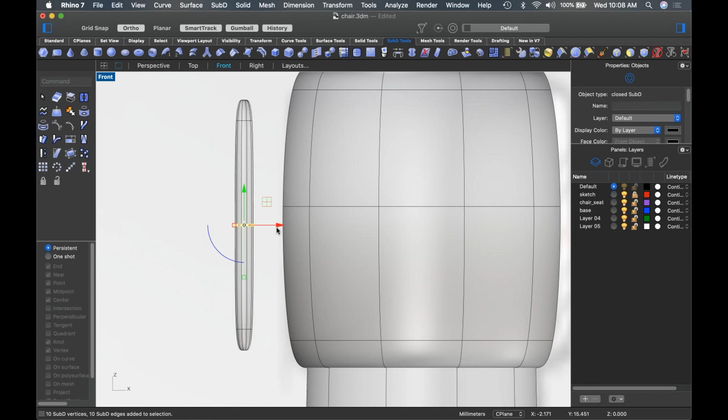And then I'm going to take this guy, the center here. I'm going to move it out a little bit just to match my shape. I'm going to take the top of this, I'm going to pull it in just a little bit. And I should probably do both of those at the same time so they match.

That's why I love gumball modeling with SubD, because you can do symmetrical modeling even though we don't necessarily have symmetry tools. I'm going to take this guy and stick it in here.

And the same rules for SubD apply for Booleans. Rhino does not like coincident stuff. So if, say for instance, this point right here was exactly on this edge, Rhino's not going to be a huge fan of that. So let's take this and do a polar array.

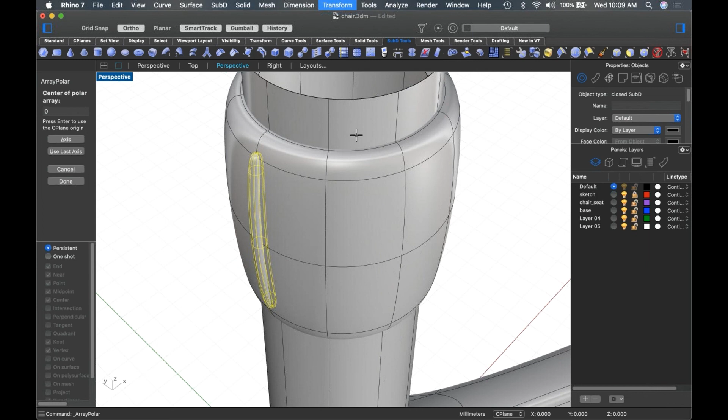And I want, I don't know, 20 of these. That gives me that. I can grab this whole thing, and if life is treating me well, these should just Boolean nicely. If it's not, it'll crash, and then I can blame my 6-year-old or 7-year-old Mac.

Hooray! So it did it. I can run the cap command to close that up. So now that's a closed Nurbs object. And then if I wanted to, I could just Boolean this out, but I'm not going to for this demo.

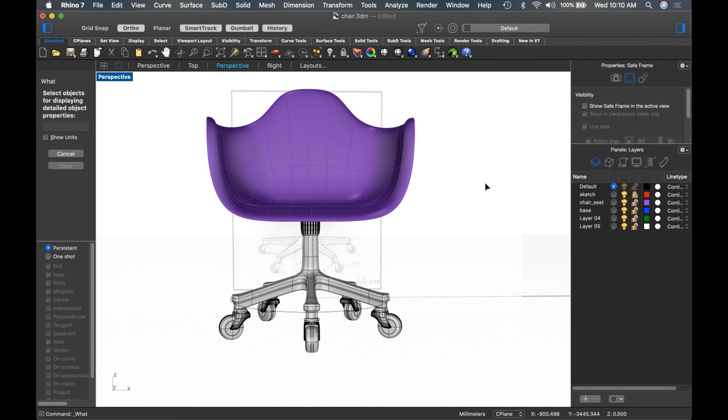We've covered that already. So essentially in an hour and 10 minutes with a lot of blabbering along the way, we've got a pretty nice SubD chair.

I did a rendering demo on the PC side. This Mac, unfortunately, the graphics in it are really slow, so I think if I do a rendering demo, it's going to be a lot like watching paint dry. If you want to see rendering stuff, because the rendering stuff in V6 and V7 is at parity across the board in Mac and PC, check out the Windows video I did that just went up on YouTube yesterday.

We can throw a few materials on here so that we can see what it looks like in rendered view, but I'm not going to try and throw it in ray trace because it'll take forever. No fault of Rhino, it's just the machine. This is a really old machine.

So let's throw a metal base on here. You can see I start getting beach ball. The second I start putting rendering stuff on this machine, the beach balls come out. It does it eventually, but it's not nearly like the 32 core i9 with the RTX 5000 with 4,500 CUDA cores that I have on the side. This guy, I think, has like 25 CUDA cores or something like that.

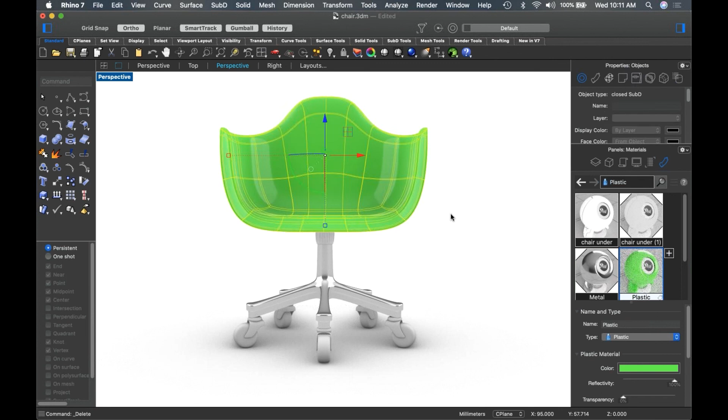So let's do a different shade. I did kind of a blue yesterday. Let's do kind of a funky, 60s office chair action here. Any questions while I do this? This is kind of the watch and paint dry section of the video.

I'm going to leave my reflectivity on this plastic high, but I'm going to drop the clarity so that it catches a lot of light, but the reflections are fuzzy. And then I'm going to grab all of my wheels and this guy up here. Let's say assign to objects. And then I'm going to make a different metal.

It's a little fuzzier. I'm going to drop the polish. We can try and throw a render on this. We'll see how it works. And then let's make this just a little darker, so there's a difference between the two. There we go, apply this to the casters. I don't know if you hear all the fans on this machine just kicked on.

Okay, so that's our basic chair. Let's go to... oh, what the heck, let's give it a shot and see what happens if we throw it into rendered view. Let's do kind of a cool background color. Ooh, that's pretty nuclear, huh? And then let's go to our ground plane.